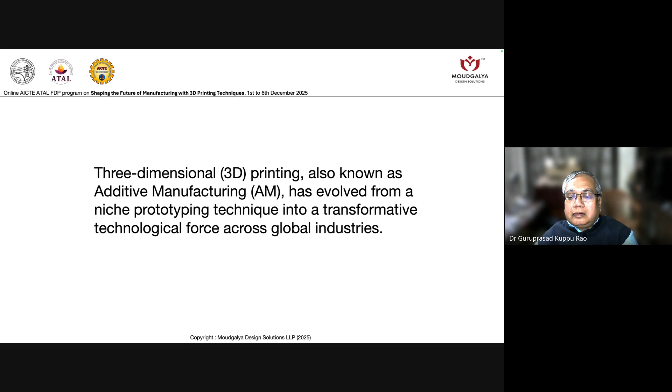So it is a fabrication of material layer by layer, but layer by layer is not a sufficient condition to declare something as additive manufacturing. You will have to ask me why. Later we'll take it. But digital model is the sufficient and necessary condition to call some process additive manufacturing.

Now tell me, CNC is also having digital input data, STL or step files. So can it be called as additive manufacturing? No, because CNC is subtractive, right? It is subtractive. So many times this 3D printing is also called as additive manufacturing with a great promise that

it is going to enter manufacturing. For me, manufacturing means making millions, not one or two, right? But additive manufacturing is something which people have kind of wanted to see that coming. And somewhere we are coming close to it, AM, right?

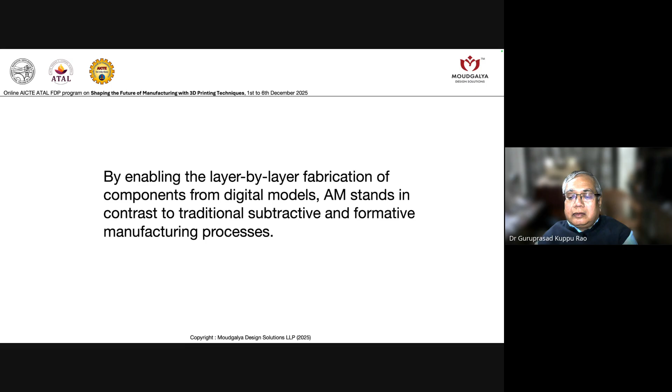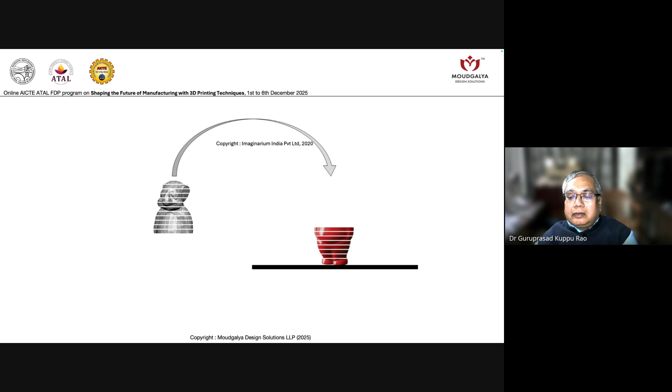So it's a long way. I've been practicing this technology. So looking at this transformation, art to part, is very, very important here. You know, how these objects are created in digital media, 3D model or content creation, 3D content creation, then that is given to a robot-like device called a 3D printer, and it is going to recreate it. With the transformation, we can change many things.

So it's a regime where we create a part directly from CAD, CAD to part transformation. So this is like a paradigm shift, which has never happened before, you know, and this is going to de-skill. People wanted to have some skills to make prototypes rapidly, but those are not required. You don't have to be a model maker. Now you can actually create things.

So this gives you a better design freedom, reduced material waste because you don't have to remove material. You're adding material, what is required. Accelerated innovation cycles because you can fail early, fail fast, and move on so that you don't have to waste time lingering on something which worked or did not work. You make a thing, you test it quickly, it fails, then you have another way. Go back to drawing board and again reiterate.

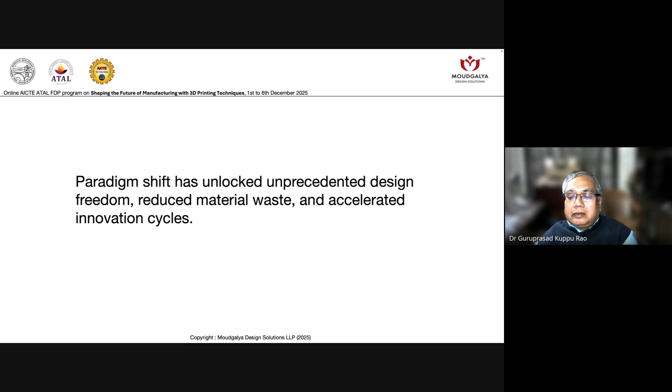Over the past four decades, the scope of AM has expanded from what it was started with, rapid prototyping, to tooling, production, mass customization, and increasingly distributed manufacturing ecosystems.

What exactly is distributed manufacturing systems? We can have a concept of cells across the country, across the globe, where whoever gets the order, the nearest cell will deliver it, make it and deliver it. That is called a distributed manufacturing ecosystem. In order to reduce the so-called lead times, just in time can be achieved by this kind of technology grid, which is a distributed manufacturing system. And it is an ecosystem.

And when we say 3D printing, it is not just everything, there are many things which are there. I'm sorry about this slide. There are some changes which have happened. What enters the value chain here is idea design on the left hand side. At the right hand side, you have the applications for which this technology is used. Now, in between, in the middle, you have 3D printing.

3D printing cannot be done without an idea, without a 3D CAD, without pre-processing, and also it cannot work without materials, without proper care and handling of the 3D printer. Even to create CAD, you require a lot of things like how to design for AM. Design for AM is very important. In order to get CAD, sometimes we go by feature-based design, geometric modeling, or by reverse engineering. So these are the inputs which go into CAD.

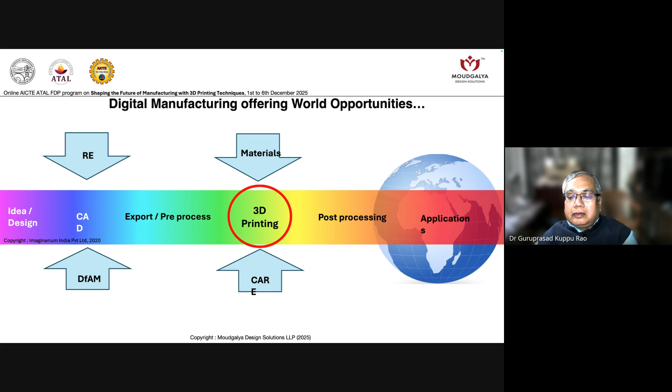As global supply chains face tightened vulnerabilities, just like during COVID time, people are looking now at how we can have a digital factory wherein we can have AM farms or 3D printing farms, wherever whoever is nearest will get that and make it on demand. And exactly this was done during COVID time. A lot of emergencies were there. I remember at Imaginarium, we were doing many things like ventilator splitters. They were not available because the global supply chain was affected at that time, ships were not moving, so we had to make it available on demand.

And digitally, those things were transferred. It was shared without any IP those days. And I think it is a very good demonstration.

Now, coming to the cloud factory, you can see not everyone can actually own printers. MSME OEMs have small and medium printers; larger OEMs like Boeing, Maruti, or Tata Motors will have large systems. Many times an individual designer or maker also wants to do something. So all these are increasingly coming to what is known as online factories. Today it's a new business model.

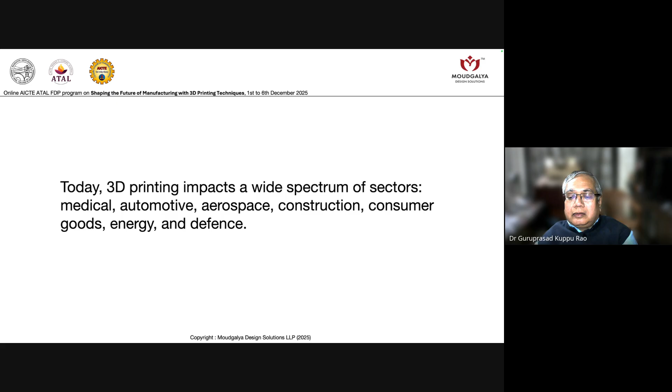So today, 3D printing impacts a wide spectrum of sectors: medical, automotive, aerospace, construction, consumer goods, energy, and defense. We can see there is a huge, changing capability that we have seen. What we used to do in the early days were mostly prototypes, form models, mock-up models, which evolved to a design validation model in the middle, 2010 onwards, and then we have end user parts from 2016 onwards.

Almost one decade has passed since 2016—we are in December, and 2026 is close by, so it's a decade, right? And you can see the capability today: on demand, a one-off part can be made and delivered to the customer. There is no economic order quantity here—economic order quantity is one. That is the beauty of the whole thing, and people are happy.

And what's more, people can actually design themselves and give it to these 3D printing companies to ship them the part they want. So it is like democratizing design that is happening.

Today there are many new frontiers that 3D printing is addressing, such as multi-material printing, bioprinting, hybrid manufacturing, 4D printing, machine learning driven process optimization. The promise to redefine the future of manufacturing is happening today.

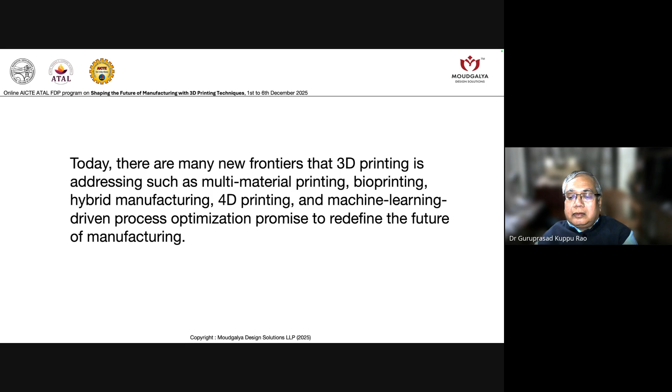Historical evolution of 3D printing. We know historically 3D printing has been attempted by many people. I can say even nature prints everything, which is additively made, right?

We ourselves are additively made. In nine months, we are delivered with a bionic eye, a CPU, a brain, and a natural pump, the heart, etc., which are hard and soft, transparent, opaque, whatever, multi-material, and it's living, right? It's something even more than 3D printing. So if you want to look at 3D printing, you always have to look at nature.

Historically, people have been trying to make prototypes quickly, and that's where they looked at photopolymerization as one of the methods. Dr. Kodama actually, in 1980, brought in the name rapid prototype. Unfortunately, his discovery could not be patented because he had no funds. It was in 1984 that it was applied, and in 1986 it was awarded to Charles Hull, Chuck Hull.

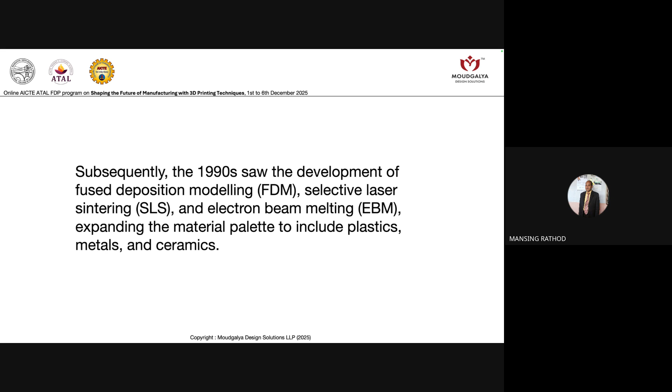Any doubt? Anyone? I hear some sound. Sir, Revas, there is some sound in the background.

In the early 2000s, many open source initiatives such as RepRap came. This led to the so-called makers' printers, open source makers' printers all over - cheap replicas of FDM technology came. RepRap is a printer that is able to replicate itself.

Replicator, a 3D printer printing itself - most of its parts are done this way. Literally, I've seen this with HP's multi-jet fusion, which is an advanced printer that has 50% of the parts of the printer printed by the same technology, multi-jet fusion, MJF - HP's 3D printer, a wonderful technology. And that's how the promise that was made got realized much later, but the capability was realized early on.

This democratized access to affordable 3D printers, and this led to a lot of new innovations. In fact, FDM had several other avatars like SCARA, and then you had Delta printers. These are very much like FDM, but the way they are driven, where the head is used, where the table moves, is going to make a difference.

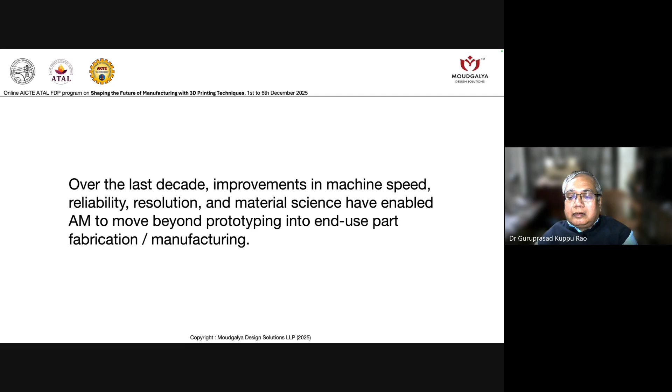Today, AM is recognized as an important player in Industry 4.0. Industry 4.0 is interesting, for me it is coming full circle. We started with so-called CAD, CAM. Before that there was conventional manufacturing, and during conventional manufacturing we started automating with MRP 1 and MRP 2. MRP 1 was material requirements planning, MRP 2 was manufacturing resource planning, and this led further to ERP. But ERP always suffered from lack of design data, so they had something called PDM, product data management. When they combined PDM and ERP, it became PLM, product lifecycle management. And when PLM across new technologies is taken, you get a new age called Industry 4.0, which has got so many components enabled by information technology and communication technology.

These are the two drivers of Industry 4.0: sensor technology and information technology. We are in a regime that is not like a fixed date, it's going to be a band. It is still going on, we are today, it is current. Industry 4.0 is something current, we are in the beginning of it. Maybe in some areas we are already in advanced stages; in some areas we are still entering it.

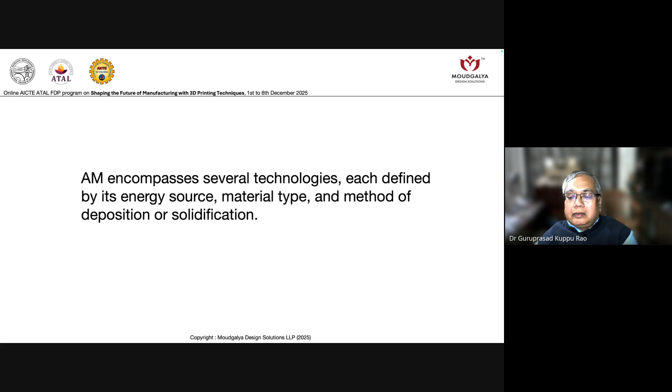AM encompasses several technologies, each defined by its energy source, material type, method of deposition, and solidification. You can see they come in all shapes and sizes, different colors. I love all of them as a user because each one is a beautiful technology. We cannot say something is bad, something is good. They're all good at a particular thing, that is important. They may be bad at something else, but we are looking at the goodness of each one of them. I've added bioprinting here also, which is not formally part of this, but there are a lot of systems coming which are again part of these only.

How to deposit - each AM process offers unique advantages and challenges. Their convergence is giving rise to hybrid technologies that blend additive and subtractive methods for improved accuracy, surface finish, and material integrity. Talking of surface finish, I always remember the 3D printer called SolidScape. SolidScape is essentially used in jewelry, medallion making, or figurine making. After deposition of the wax, the surface is very bad, there's a waviness on the surface. So at the edge, a milling cutter comes and mills that, giving a very nice surface for the next build, every time it does this.

The hybrid technologies beautifully blend additive and subtractive methods. SolidScape is a good example, which is quite expensive because it combines these two technologies. A controller is quite complicated, the G and M codes have to be separated, it is two channel, and hence the expense. But the quality is superb.

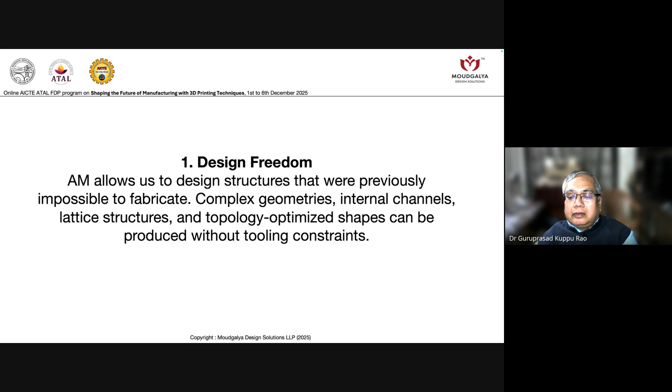You can see some of these are very complex, unimaginable, and cannot be produced at all by normal manufacturing wisdom. Why unimaginable? It is like you have a mathematical equation driving these curves. You start giving n equal to 1, 2, 3, 4, and start getting new proliferations, just like a kaleidoscope. At every change in n you get a new shape, and you freeze wherever you like, save it as a solid, and give it to the 3D printer to print. No questions asked. Some of these are impossible to even imagine.

Customization and personalization are very important aspects, be it custom jewelry design, custom implant, custom device, or custom footwear. All these go by the anthropometric dimensions of the user. Anthropometric dimension means each one of us is a different size and shape. We are unique people, so in order to have something designed and made for you, it is not just customization, it is personalization, and individualization in fact.

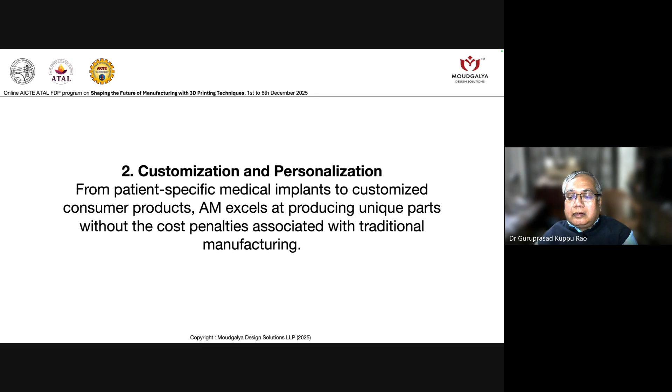You can see here, this is a wedding ring I made. What you see in light blue color is a wax model. The bride and bridegroom's finger thumbprints are taken to personalize this with names inside, which go inside the shank, and it has been additively made in wax, then cast in metal using a lost wax process or investment casting. This was actually gifted by me. It exists, it is not a concept.

Material efficiency: many times we say near net shape. What is near net shape? You take a cylinder, turn it, and make an artifact. Suppose you can make that artifact directly at its gross size, or what we call net shape. Net means gross, and that is possible by additive manufacturing or 3D printing, because we build layer upon layer. Only what is needed is deposited in the same shape as required in the end, and in between the two layers we fill to get the solid section.

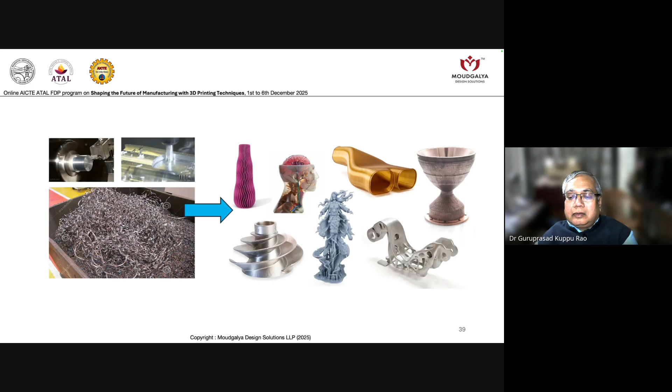It could be of many natures, you can have honeycomb also there, and these are all impossible by conventional manufacturing systems. Scrap is minimal. You can see here in conventional manufacturing wisdom so much chip is generated by turning or milling, but the artifacts on the right hand side are all made additively, as net shape, gross shape. There is no chip here. That is the beauty of 3D printing or additive manufacturing.

On demand production: what is on demand production? AM supports decentralized manufacturing, enabling parts to be produced as needed. There's no need to carry inventory, you can have a digital inventory instead, and because of this you can have a very short supply chain.

Locally, one industry can supply things without needing an elaborate highway or transportation network to carry this out. We had earlier mentioned the decentralization of manufacturing, and I think that's really what is going to ensure just-in-time production, just-in-time supply, and just-in-time consumption. In load centers, suppose you want a drug to be made, you can have a 3D printed drug ATM placed in the tertiary care center, or wherever people want to buy it.

You don't have to have a factory and make it, but you can actually have it in the tertiary care hospital only. Drugs can be given like an ATM.

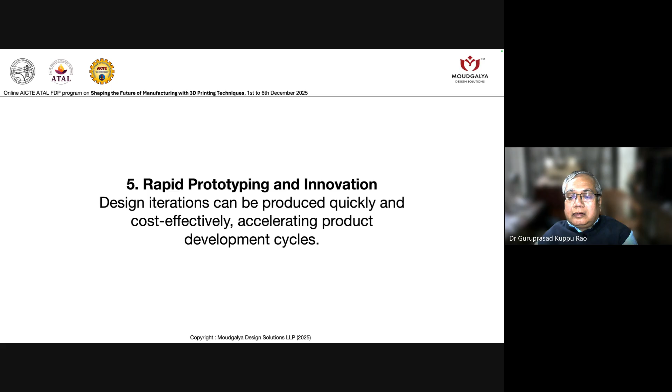An idea could have potential to be innovative, but you will never know. So it is very wrong to say innovative idea, because you will never know what comes after that, whether that is the end or there is another iteration you're going to make after the feedback is received. These are called development cycles, and the whole thing gets accelerated. That is very important.

Lightweighting is a great advantage, particularly in technologies like SLS. One can have a nested product, a product which is pre-assembled, because the support here is powder, and in CAD you don't have any gravity, so you can have a ball inside a ball inside a ball, as long as you have some means to remove the powder in between. After removal of powder, all these balls will collapse inside.

In fact, these models used to be made to show people. I don't have those models, I would have shown otherwise. These are wonderful things, and they are achieved by lattice.

It is like a sponge-like structure, a structure which can be seen readily in nature, like bone structure, or what we have, the coir structure, or sponge. All these have lattice, and the lattice can be regular or it could be varying functionally. Sometimes we call this the functionally graded material. When we go to material, we'll discuss that.

They have a kind of polarization of the strength that is required. In a particular area, you need something to be strong, something to be lighter on the other side, just like in bones. In bone structure, if you take a section of it, you will see these are optimized geometries. The lattice structure is made in such a way that wherever strength is required, where resistance is required, you find closer density, and wherever you need light weight, you have a sparser density.

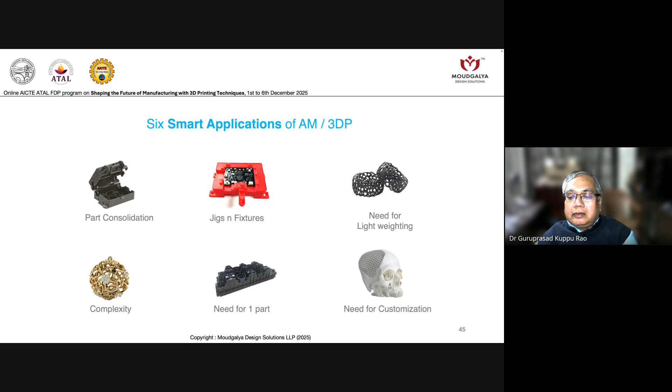Current applications across industries are many. I'll not go deep into every one of them because I know if I cover all the course contents, what will others do. I will not touch upon these things in depth, but I'll just list them.

Aerospace and defense. Defense today is becoming very strategic. Defense for peace, not for war - it is for deterrence. You have the capability and I have the capability, so be careful. That kind of deterrence. Today wars are very rarely fought between equivalent powers. With very powerful versus very weak people, there is war, but whenever they are equivalent, wars are not happening. That is very interesting.

Automotive industry - as you know, each car used to be made up of 30,000 parts earlier. It's all coming down thanks to part consolidation, which gives better reliability. The systems are changing from IC engine to EV, so a number of parts are changing.

This you can imagine like how a mechanical watch today has become a quartz watch. A quartz watch still has gears, but very few. A mechanical watch has such high complexity. At Titan, I used to have a watchmaker's lathe - we used to make very precision gears and shafts which can only be seen under a microscope, all mechanical. Today, because of quartz technology and a stepper motor, the whole gear system has come down. So I compare this with the conventional automotive system versus EVs.

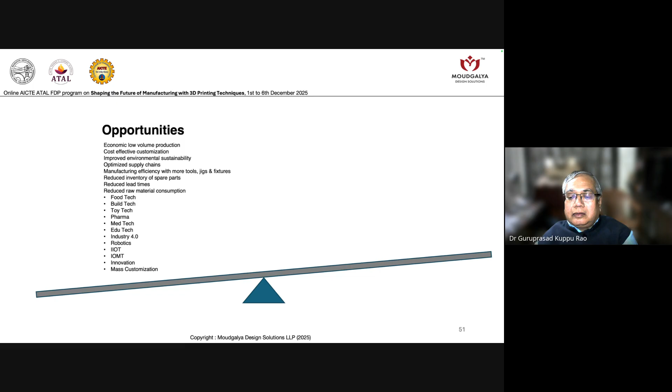Moving on, you can see there are a lot of challenges on one side, and a lot of opportunities on the other. Opportunities like food tech, build tech, toy tech, pharma tech, med tech, edu tech, Industry 4.0, robotics, IIoT, IOMT, innovation, mass customization. All these are going to outweigh the challenges.

3D printing is not standardized. Additive manufacturing impacts environment. Equipment and product costs are high. There is no 3D printing knowledge - there is a knowledge gap. Additive manufacturing complicates intellectual property. There is limited material available. All this we have discussed; the same thing is put in a graphic.

Future avenues of 3D printing - there are many, and we are going to list them.

Multi-material and functional printing - very important thing. For example, you start with bimetal, copper and nickel, or copper and iron kind of thing. It can become a smart material. For bimetal, you have the thermostat and all - they have their own property, because given exposure to temperature, one side expands more than the other, thereby making it sag, thereby controlling a circuit intelligently. So materials themselves can be very smart also.

They are using this in dental implants and surgery. There is what we call 4D printing sometimes - adaptive materials which respond to a stimulus: temperature, pressure, light, sound - it could be anything.

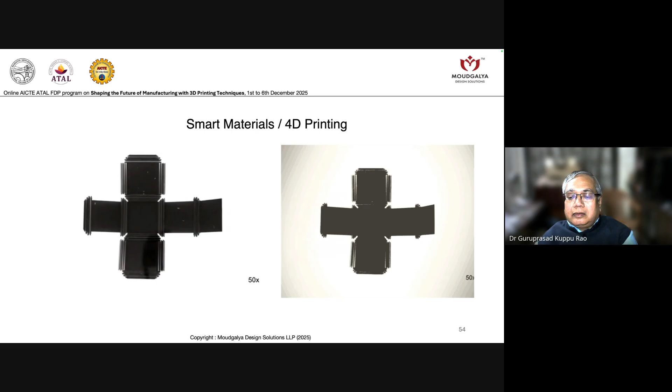Ethical, social, and regulatory considerations are other very important aspects. Some important questions: how do we regulate decentralized manufacturing? Who controls it? Who maintains the quality? Who will regulate it is very important. There is no policy for this from the government, manufacturing people, or the cluster - nothing has been formulated.

I remember working on this project with Professor Attanu. Sometime back, it was given to FICCI, through the government. We don't know what is happening there. What are the safety standards for 3D printed medical devices? What happens? Who has to be held responsible? These things need to be addressed too, because medical 3D printing risk is very high if something happens - it will affect somebody's quality of life, and life itself.

How should government address weaponization risk - 3D printed firearms? Today we have so much terrorism. We hear so many things, white collar terrorism - doctors are becoming centers of terrorism by carrying out some of these activities. Now, what if they can print their own firearms or bombs, or things which cause mass destruction, using 3D printing? This is again a very important issue.

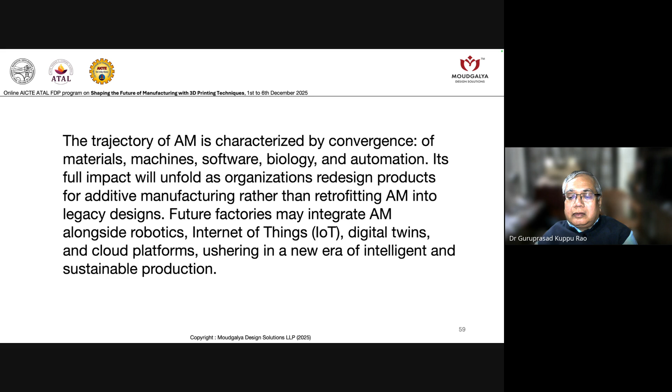AM will not completely replace traditional manufacturing, but it will increasingly complement and enhance it. High volume components like nuts and bolts, washers, even street poles, will go into conventional manufacturing - they're made better that way, like injection molding, extrusion, machining - while AM will dominate complexity, low volume, customized, mission-critical applications.

So in fact, people are looking at extraterrestrial building things on the Moon, building things on Mars, or maybe Titan, the satellite of Saturn, which is very much like Earth with a blue sky and all. So people are looking at many things like that.

In conclusion, 3D printing is here to stay, and it has its own evolution. It is not, though people thought it is going to make a revolution - while the contribution is revolutionary, I think it is evolving to deliver value, and it is on its way.

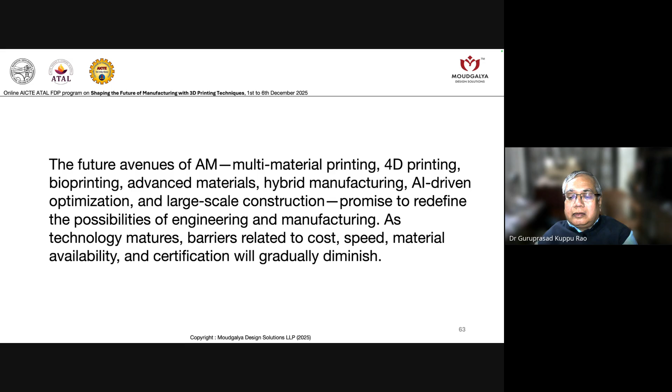Today we are saying it's still costly. That's where it is a big hindrance. In future, I think we hope all these things will be addressed.

Ultimately, AM is not merely a method of application. It represents a new philosophy of making - a new way of making things. One where complexity is free, customization is standard, sustainability is achievable, innovation is democratized. The coming decades will witness AM becoming an indispensable pillar to global industry, healthcare, infrastructure, and our daily life.

Thank you. I think with this we come to the end of the presentation. I would like to take a few questions.

Reva, you can take the control. Yeah, thank you very much, sir. Very insightful lecture, sir. Actually, I was listening to you, and I'll ask the first question, and then I will leave it to the participants.

Because I'm very curious about a few things which you mentioned in your lecture. So, sir, first is the legal aspects you mentioned. How is the preparedness as of now regarding the legal aspects, particularly in India, if you can take that into consideration? No, it is evolving.

I'll give an example. When I had a call from a surgeon way back in 2012, more than 10 years ago, and the patient's family thought I could help them, I could save them, but I had no idea how. We went on to discuss a cranial plate, which was supposed to be 3D printed.

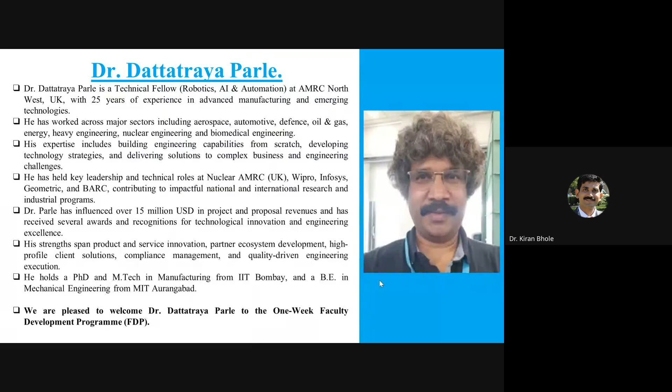Thank you, Dr. Kiran, and thank you for inviting me. Nice meeting you online. Since COVID days, we have not met physically, right? Maybe when I'm in India next time, I will certainly try to meet you. I'm not sure how I'll share, but let's see whether the sounds of the video will come. I don't know.

Is that visible, Dr. Kiran? Yes, yes, it's perfectly visible, and audible also, very well. Okay, thank you, Dr. Kiran.

For the participants' information: myself and Dr. Kiran were doing PhD together at IIT Bombay, and since then our journey started. It was wonderful. We try to keep meeting on various forums, and this is one of the forums where Dr. Kiran always tries to involve me in some of the things at Sardar Patel.

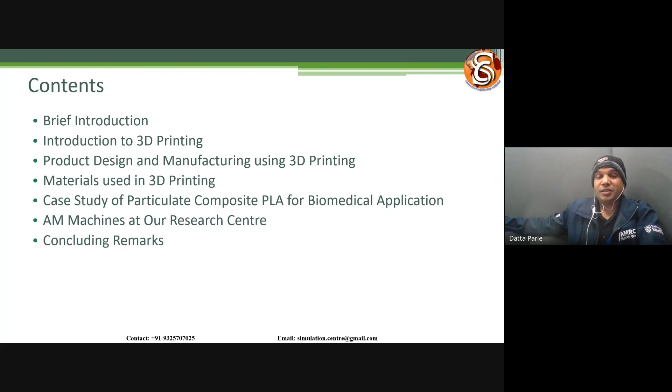Brief summary: for maybe two decades now I've been in industry and research, mainly, but also associated with a lot of academics, through people like Dr. Kiran, mostly in Mumbai, Pune, Maharashtra. I'm involved with many institutes, delivering lectures or participating. I've done a lot of different work in my career. Primarily in my early career I worked more in CAD, CAM, and CAE, and then in the last decade, more focused on emerging tech like Industry 4.0, digital twin, additive manufacturing, VR, AR, autonomous vehicles.

I also did my nanodegree from Udacity as a self-driving car engineer, probably another future technology. I was also a major part of software development, participating across the product life cycle for different customers, concept to manufacturing, in aerospace mainly, automotive, and nowadays a lot of defense work, but defense of the UK, not our country, oil and gas, energy utilities, and nuclear early in my career. When I moved to the UK, I worked at a nuclear research center, and then in biomedical.

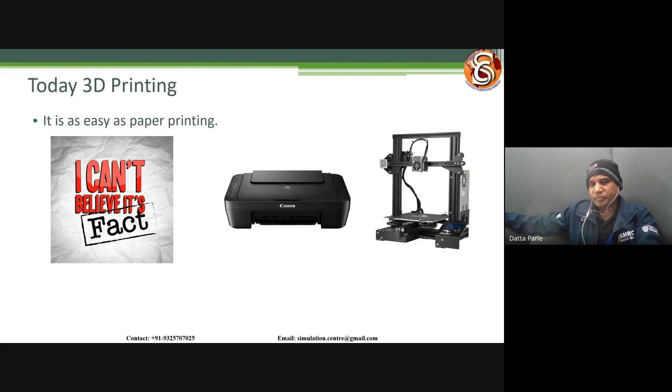Today, 3D printing, I'd say, has become as easy as paper printing, if you are looking for low cost options. I'm not talking about industrial printers, I'm talking about common 3D printers. If you look at the shape and size of low cost 3D printers versus paper printers, they are comparable today.

The way 3D printing works is the same way as paper printing. What we do in paper printing is create a document. We open a doc file, write something, send that file, and get a hard copy of it. Same way, if you know a bit of CAD, you create something in CAD, send it to the 3D printer, and get that part ready. That's how it works.

Even if you look at industrial printers, they work similarly, but there's added complexity in terms of what kind of material you handle, toxicity, temperature, maintaining those parameters, and other challenges. But as a common man, if we're looking at 3D printing, it's as simple as that - as good as a paper printer, right?

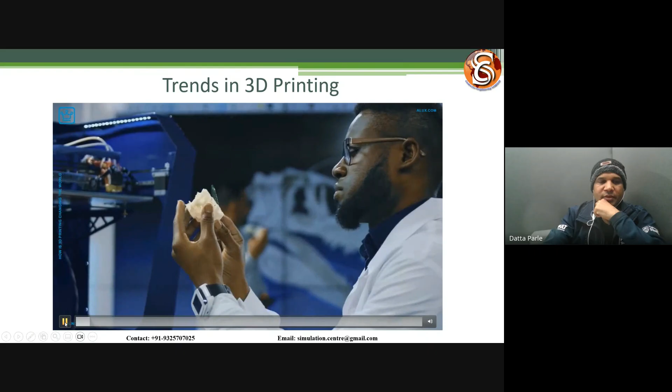So maybe I'll play, I don't know. That's what I was thinking. Let me know if this video sound is coming through. Understand how possibly it's going to change things. Is that audible, Dr. Kiran? No, right?

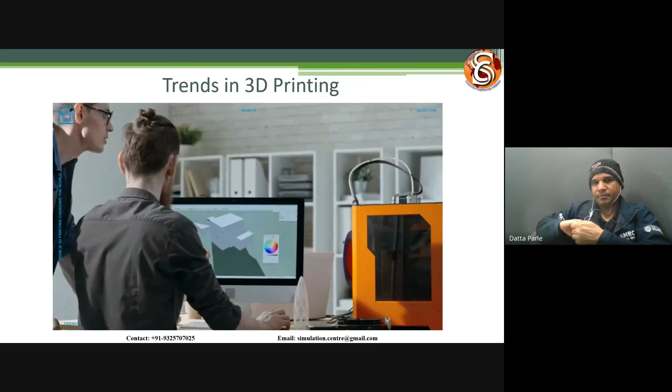What if you could print your pizza in your own favorite shape and then have it for a meal? What if you could print spare parts for your grandfather's antique car and have it fixed for him? What if you could make your own custom-made objects at home for your loved ones without paying extra charges for the customization? What if you could build your dream home in a shape as complex as you want without compromising your aesthetic sense? And what if you could save the life of your loved ones by replacing a damaged organ with a 3D printed one?

So, I mean, this is the reality. This is going to be the future. This is what's happening.

Just to give one example - before I shifted to the UK during COVID, I was looking for different kinds of jobs in research centers and companies, and applied. I thought I would also try a postdoc, and I got one postdoc, which I later did not accept, in biomedical 3D printing. So there's a lot happening, and that's what you can see - the future is going to be there.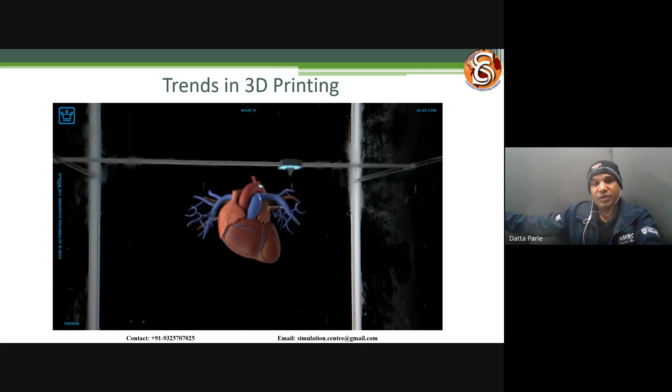3D printing is there to create some magical things in the future. So maybe I'll quickly go into this - you will hear this again and again, but I'll quickly try to jump into it.

Manufacturing is a manufacturing process, right? There are several manufacturing processes, and as a mechanical engineer, we have been studying forming, casting, machining, powder metallurgy, welding, and all sorts of different kinds of manufacturing.

Now, for probably a decade, we've been hearing a lot about 3D printing, or alternatively people call it additive manufacturing, but this is not very new. Earlier also it used to be there, but when I was doing my masters at IIT, it was there, but I didn't realize it would be the future of manufacturing.

So there are various subtypes, we'll go into later, but the way we call it additive is because we add the material. It is an addition of material instead of removal of material, or changing the shape of the material. We are adding new material in some way, and that is why it is called additive manufacturing.

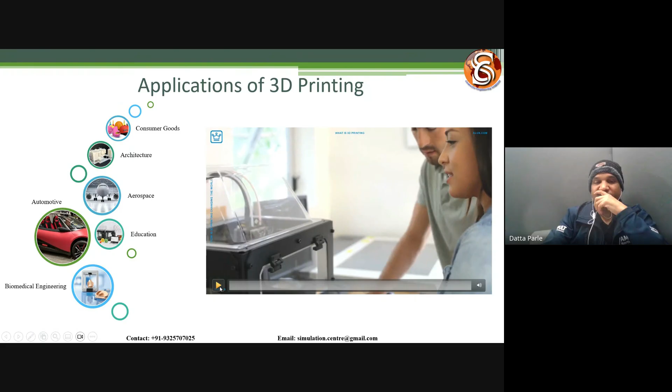Maybe you might be hearing stories these days. Somebody has constructed a house using 3D printers, or somebody has constructed automotive parts using a 3D printer, or somebody has manufactured aerospace parts. So it's not novel now, because more and more development is happening in this world. A lot of applications are increasing, so here is a brief video.

You can almost create or print anything and everything using a 3D printer. So let's take a look at a few of the applications where this technology is currently being used. Where are we now?

Today, 3D printing has found applications across various sectors and has helped these sectors by making it possible to create objects that are costly or difficult to produce using traditional manufacturing techniques.

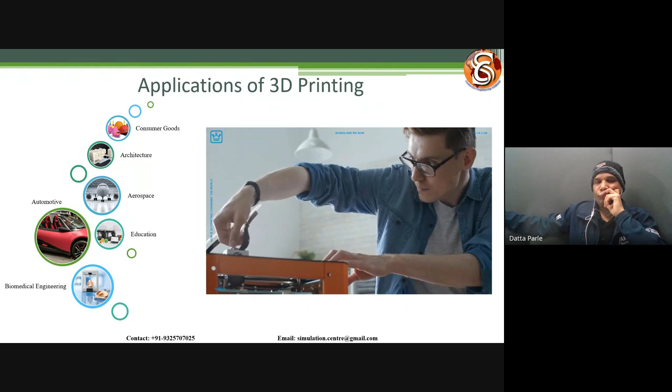In the automotive field, German automotive manufacturing giants like Audi have been using 3D printing for quite a few years now, and as recently as 2017, they started their own 3D printing center in Ingolstadt. Audi uses 3D printing for manufacturing spare components with complex geometries, which are otherwise costly to make, considering the low volumes that are produced.

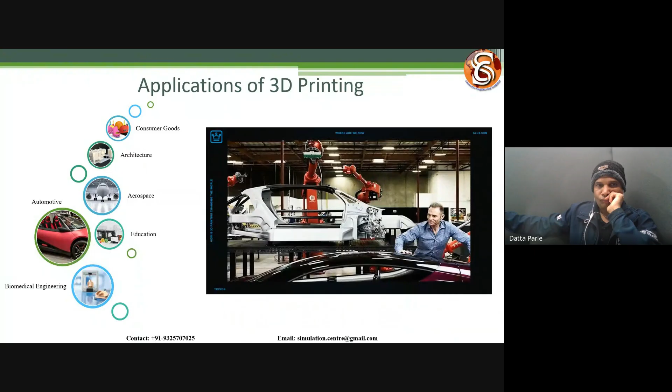However, the use of 3D printers is not just limited to making spare complex parts. Now there are several startups like Divergent 3D that are prototype testing 3D printed cars. These startups have at present successfully created car frame bodies and chassis using 3D printers and are aiming to develop entire cars that can be 3D printed.

Considering the nature of this technology, 3D printing helps to eliminate the waste and pollution created by factories, and will not only change the automotive sector but the entire manufacturing sector in the coming years as it advances over time. In the field of medical technology, a lot of research has been taking place to explore the opportunity of

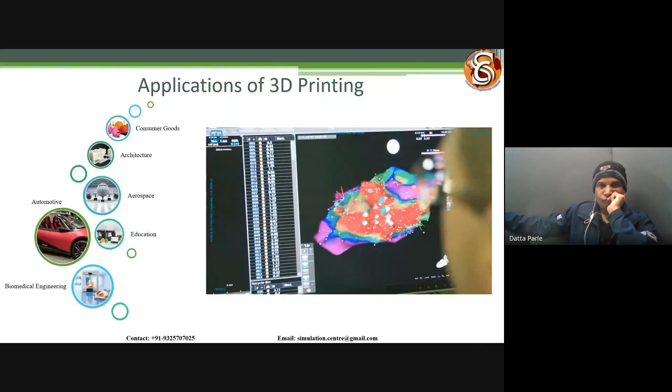creating 3D printed organs that could be used as a substitute for organ transplants. Once fully functional, this technique could help doctors create organs and tissues compatible with a specific patient's anatomy.

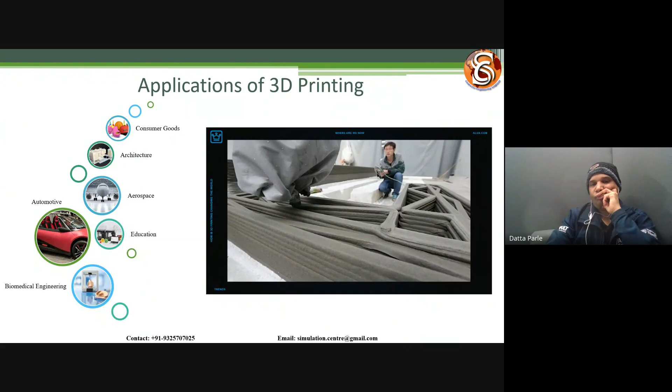In the field of construction, Dubai and China, who are considered to be construction giants, have been working on developing 3D printed houses and skyscrapers. In fact, a company in China has claimed to have built 10 houses in 24 hours using 3D printing technology, whereas Dubai is claiming to build 3D printed skyscrapers by 2030.

Such applications in the field of construction will not only help in cutting down the manpower costs and inefficiencies involved, but also make it possible to build complex structures in shorter time and in a cleaner way.

3D printing is also disrupting the food industry, and 3D printers that can be used to print food have already been prototype tested in England. These 3D printers can be used to create food like pasta and hamburgers in your favorite shape, and all you need to do is cook them in a microwave once ready and eat. Sounds kind of fascinating, right?

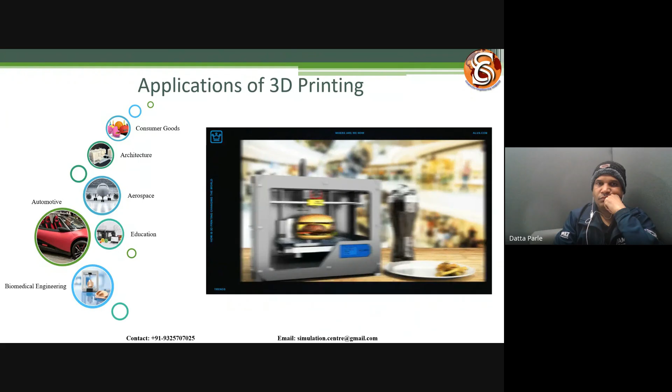Some of these food printers are also available for sale, and you guys would be delighted to know that one of our favorite fast food giants, McDonald's, has announced it would be selling completely 3D printed hamburgers called McMac by 2020.

So that is a brief overview. I mean, those videos were old, this lecture is more than 5 years old now. So going into the history, I still remember.

The 80s and 90s were still infancy days. I completed my BTech in '99 and joined IIT Bombay for my master's program. There was a professor, Karunakaran, who had developed this layer by layer deposition machine - at that time we used to call it rapid prototyping. If I have to be honest, it was such a slow process that I used to think, is this going to go anywhere in the future? Maybe 20 years later, or 10 years later, I was wrong - that is the most talked about process today, the most talked about machine which he used to demonstrate and teach us during that time.

The early 2000s changed a lot and made a lot of progress, and since the last decade, 2011 to today, it's been tremendous. At the research center where I'm working, although I'm not exactly part of the additive manufacturing group - I'm more into AI and automation for all the groups - we have state of the art, the world's largest industrial 3D printers. We are trying to create the most complex parts for aerospace, defense, and automotive sectors. I'll not go into too much detail on this.

Taking a step back - during COVID, I was doing a lot of 3D printing, and people used it for a variety of purposes. People started creating things like hooks to avoid infectious diseases and contact. I also tried creating some. The process is simple: you create a 3D model file, a CAD file, send it to the 3D printer, remove it, clean it, and use it. I did a lot of my own products, mainly for personal use.

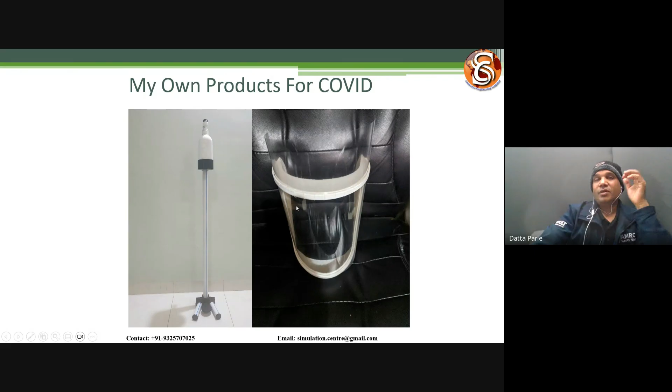During COVID, I had my own startup, a simulation center, and I used to do a lot of different things. One of the first things I did during that process was create a lot of 3D printing products, and all of those were available on Amazon. Some of these are here, though many I haven't listed.

I was also working on another technology called VR, virtual reality, and created VR headsets, lots of different types, forms and shapes. For Christmas, we made some customized ones - the first VR headset we created was tricolor shaped, and these are all different mixed colors. One good part of this 3D printing was it was all done using the lowest price 3D printer, the Ender 3, and I did a lot of research and experimentation with that.

All these are jointless - a complete one piece product, no joints, no separate color parts. We even did some DIY kits of the same headset. Then we created something called the VR selfie. I was also trying to design filters for doctors during those COVID days. And this was one of the popular items on Amazon - a 3D printed Pac-Man game. It was very popular, but unfortunately I had to stop that and shift to UK.

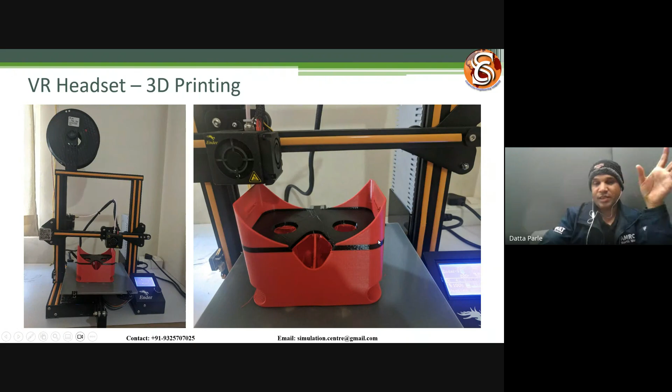So, let me see if this video works. This is a kit from the Simulation Center to make a more durable VR headset. This is what you will get.

So these are the parts: this is the base plate, top plate, flap, lens plate, side plate, splitter, lens holders, lens, Feviquick, and this is a plastic rod - I call it noodle.

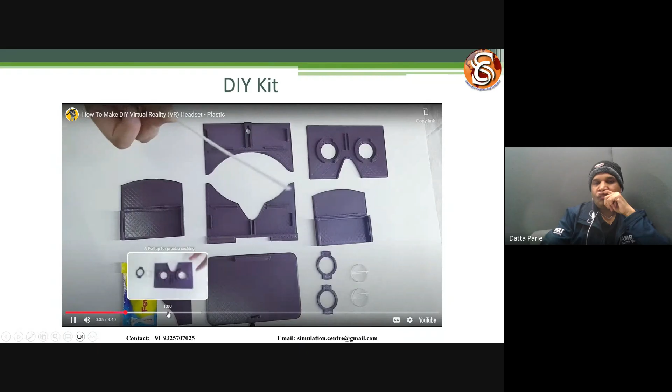So I'll just show you these parts being used. We used to create a VR headset, and that VR headset, if you want to see, can just store it. And if you want an elastic band, you can use it. We used to play a lot with this.

We used to do a lot of experiments with this, because the way you print the 3D part on those machines has its impact. That's how my PhD students' research led to my experiments with this machine, and then we did a lot of research on that.

So then there were some, we started doing industrial products and all that, and then COVID started, and probably we stopped. I did not do much later.

So at one point of time, I was an Amazon entrepreneur, I call it. I used to create a lot of 3D printed products and sell them on Amazon. And that was something I thought would be a base for the research I did later.

A couple of students I was co-supervising in India worked on it - one was from Uttar Pradesh, one was from Pune, and again two different topics. One was in artificial intelligence, one was in...

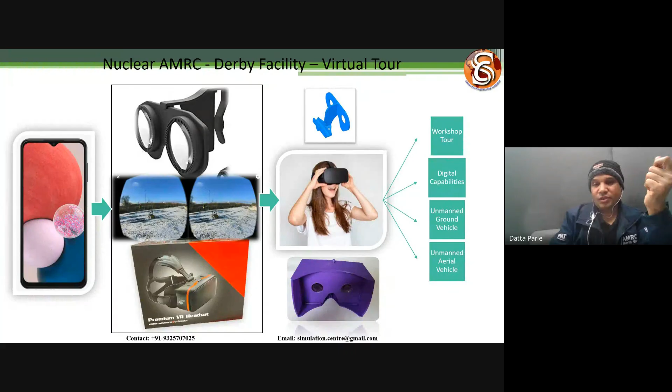I'll be talking more on that, and then after coming here also, we started creating our own in-house 3D printed VR headset for virtual tours of the facilities, and for that my VR headset got some recognition.

A Business Standard article was published, not for the 3D printed version, but because I created a VR headset for 200 rupees - it was the lowest price worldwide. Those days, I'm probably talking about 2017 or 2018, so it's been 7-8 years now.

And those days VR was a big boom, like today's AI, and the VR headsets were costly and all that. Then I led some VR services based businesses in Infosys, and after leaving Infosys, I created this cardboard VR, and that changed everything.

Later, once I was successful making that popular and selling it on Amazon and various places, then I created further products. I did 3D printing work in Infosys, where we were trying to create a strategy for how existing parts in aerospace and automotive could be replaced with 3D printing, and that's where I got additional knowledge of 3D printing.

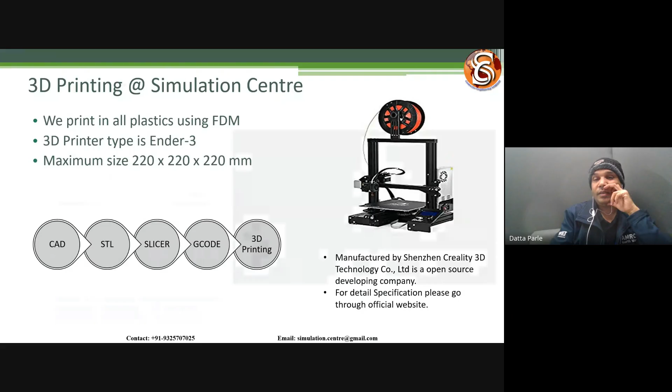This was the printer we were using those days, and we created a variety of those products you have seen. This is called FDM 3D printing.

Now, the way FDM 3D printing works - I'll just show this, probably many of you already know this.

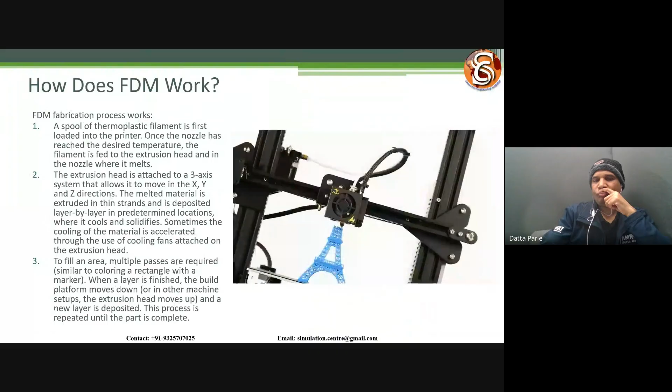So it's more like a structure, like a three-axis Cartesian robot. You have this filament spool which is melted and deposited - there's a program running to deposit this material, and motors are there to move it in the x, y, z directions and all that.

That's how it works. You can control it - essentially it runs on G-code, which if you're familiar with NC programming, you will understand. That's what we used to do - I used to do a lot of experiments with that G-code to get what we wanted through these low cost 3D printers.

And that's how then a lot of interaction started with the industry and with academics, and that's how two students started doing PhD with me, and I continued even after coming to UK, and that is how it became the...

One of the philosophies which I was trying to run at the simulation center was that we won't do prototyping. Often today people talk about 3D printing as prototyping, but we said we'll create directly the product using the 3D printing process.

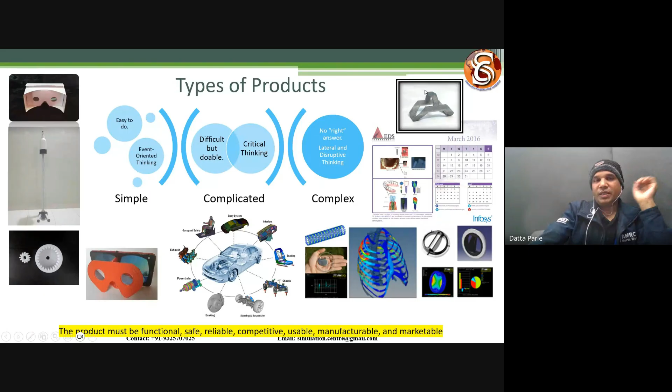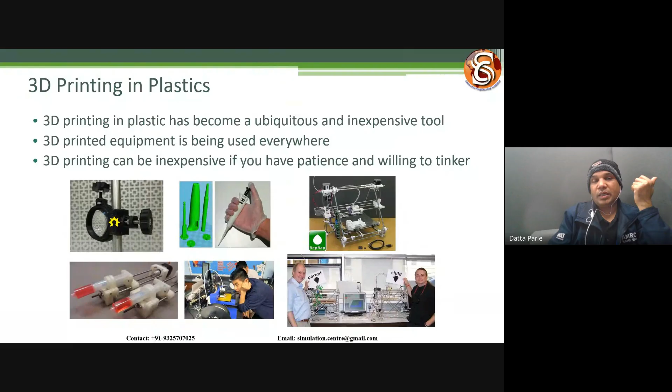So this is FDM, fused deposition modeling, but there are some advantages as well as disadvantages. FDM is the most cost effective today for thermoplastic parts and prototypes, and a wide range of thermoplastic materials is available, different kinds of materials.

Probably, if I did not really calculate, but I might have used almost 200 to 300 kg of material, plastic PLA primarily, and maybe some amount of ABS and other materials during my startup days. FDM has low dimensional accuracy compared to other 3D printing technologies at industrial scale.

But there are several challenges because of the way it works, right? Post processing is required, sometimes adhesion issues, and that is how one of the PhD students came up with this, because of looking at these challenges, since we don't know how to print optimally. We had to do a lot of experiments first, ensuring repeatability of the product. We had to think about whether we should print vertical, horizontal, all that. So these are the other challenges.

Because the core topic is on materials, right? So my students' research is on materials. I wanted to talk more on that, so I thought maybe I'll give this background, how it started, where it comes from, and material use in additive manufacturing. There are a lot of materials being used - a variety of materials. People are trying ceramic, smart material, electronic. Now there is 3D printing - in our research center they are experimenting 3D printing of PCBs, and there are biomaterials, composite materials, hybrid materials, alloy.

Someone was asking whether we can use alloys. Yes, nowadays alloy materials are coming. Polymer materials - I talked about and showed you a lot of polymer products. Metallic is also now very matured. Metallic polymer is very matured. All the others probably are still kind of in a trend. We don't know where, but in the next few years probably they will mature and become one of the mainstream materials, the way today polymer and metallics have become.

And to some extent I would say alloy will also become mainstream, because if you are able to do metallic successfully, maybe alloy metallics would probably also be done successfully. But in future, maybe biomaterials - pharmaceutical application related materials, or electronic side of application of materials, or food side - are still at very initial stages and may take some time.

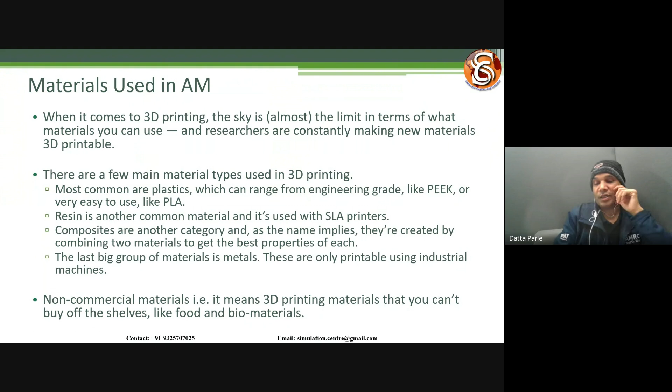And then metals I already mentioned, and maybe in future you will have more. Today it is not very commercial because the technology has not matured much, but in future biomaterials, food materials, or pharmaceutical materials might become very common. Who knows, maybe you will get a machine to print your own pharmaceutical medicines.

In FDM 3D printing, mostly plastics are used. The very standard, very common plastics today are PLA and ABS. Then another engineering category of plastics - a lot of those are TPU, and I have used nylon and PETG in my startup. Probably advanced plastics I have not used much, but they are there. A lot of our work was around PLA and ABS.

One of the things I want to talk about - PLA and ABS, although they are very standard plastics, PLA is a thermoplastic and has also become very popular in biomedical applications because of its relatively good strength, biocompatibility, and biodegradability, as well as simple processing and modification. That was one of the things which gave the direction to our research also.

Now, what are the challenges with plastic 3D printing? Some of the challenges, again coming from my own experience, and I have picked up some pictures from the internet just to make it clear. So there are challenges with respect to...

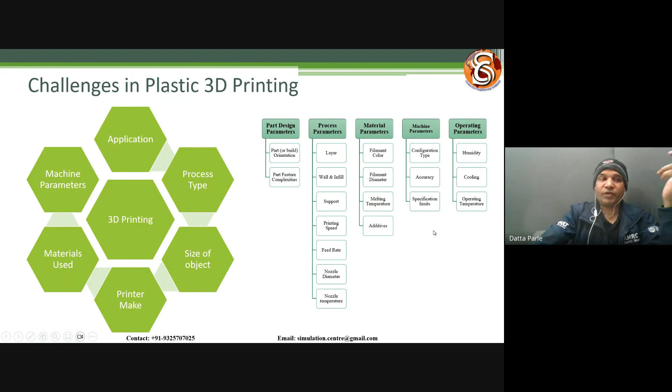Most of this we have seen in the VR headset - one single piece, not the DIY kit - and in that face shield, a big helmet kind of face shield. So we have seen layer shifting many times, and layer shifting was very common for thin parts, and it affects the print. We'll talk about the analysis we did later.

And then there is layer separation, because when the part, like this helmet part, or our VR headset which was almost 180mm in height, and this helmet kind of face shield was also around 200mm - by the time we printed the top layer, we probably started seeing some of these issues.

And then clogging became one major challenge for my PhD student, again because of the nature of the material we were trying to use.

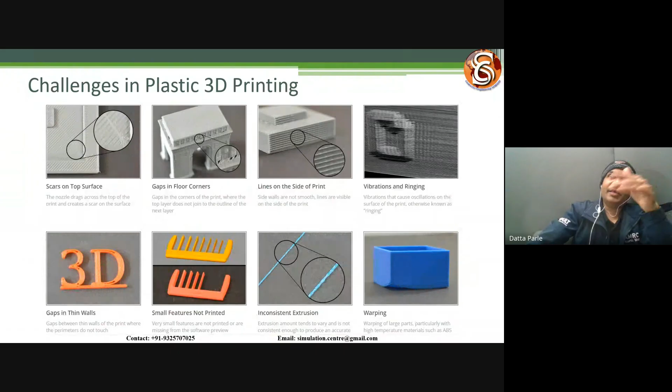The maximum thickness in that product was 2 millimeters in any wall - 2 millimeters was the maximum thickness, you can imagine. Many other products were also so thin. Even my student's specimens for strength testing were in that range. We did extensive work for that.

So these are some of the things we observed, and that helped a lot. I mean, we did not really try to address these in our research, but these observations and experiences while manufacturing my own products helped me guide a couple of students in their research.

So what he wanted to do was PLA composite PLA for biomedical application. And why PLA? As I said, PLA is biocompatible, and PLA is now approved by FDA for medical application.

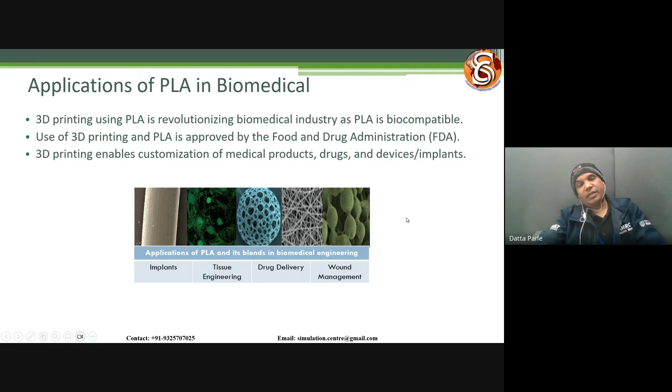In future research, people are now trying to use PLA for implants, tissue engineering, drug delivery, wound management, and a variety of purposes. That is why we wanted to make sure how we can make a better PLA, a different PLA, considering biomedical application. Then we started looking at one of the proposals he made, which was composite PLA.

Then we started looking at what way we can do the composite PLA, how researchers are doing it. So people probably use fiber reinforcement composites. Maybe we also thought, can we now use some metallic

filaments within the filament? But then the question was whether it should go through the spool and then melt, or how are you going to ensure the melt, or maybe can we put some finite length microfilaments while printing itself. A lot of that research we are trying to find out, how do we get or can we do a nano composite, or can we do a particulate composite

adding different kinds of particles into the PLA material, different polymers, ceramics or metals, other materials to improve the PLA performance. So we were experimenting, we tried almost all, but finally we realized, within our laboratory environment or our own constraints, we may not be able to do any of this. Maybe we will go ahead with this, and that's how we decided.

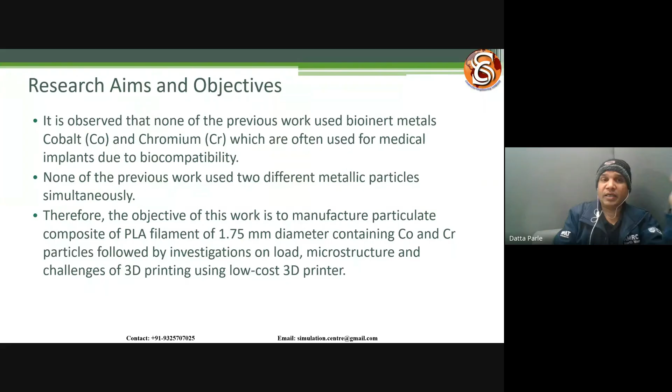So then, during my product design days for 3D printing, I came across a lot of parameters of it. So I asked him to study this, specifically focusing on orientation, because I observed through my own practical research experience into my product that orientation has a major impact compared to any other factor.

So I said, let's study all the parameters and see if orientation is still the major factor to study for any of the products. Another reason was that any complex part can't have just one orientation—it will come with a combination of orientations for different regions of the product. So that is what we observed.

Now, for example, we selected one application, let's say a finger splint—an external device. We really didn't want to do the internal part, since we never had biomedical testing capability. So we thought we'll go ahead with some medical device which is externally used.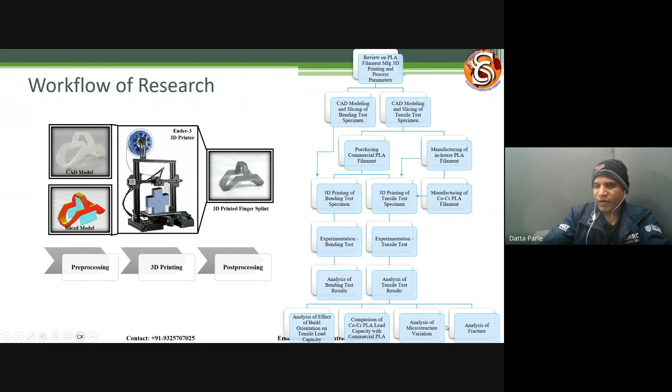I said it was the most common based on my own experience, but we also wanted to address the product design related challenges, and then comparison with variety of other analysis of fracture, analysis of microstructure, and all that. So what we did to begin is we bought commercial PLA. That was the reason.

If you see this finger splint, if I am printing in this way, different regions have different orientations. If I take a tensile test specimen here, some regions are vertical, some are inclined, some are inclined on the edge, some are flat on the bed. So these are all considering the possibilities for any complex product. We'll have a variety of orientations.

We started, different names are used in the literature. They may simply use X, Y, Z or upright, flat, edge and all, but we came up with a common terminology. Flat means on the bed. Flat with support means I'm not directly printing, like for example this top one, I'm not directly printing on the bed, but there will be support.

So flat, it is a flat part, but more like this region, but on a support. And then this particular one, it's not on the edge, but edge on the support. And then there is this region, if you see, this is on edge 45. Then this region probably here is upright 45. And if there are some vertical regions, it will be upright.

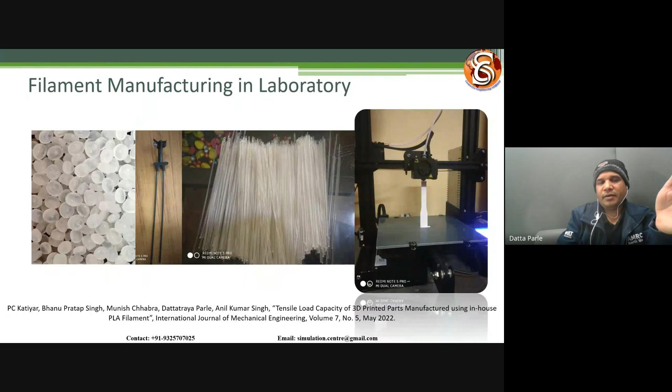And then after creating this PLA filament without adding material, we wanted to check how our own PLA stands in comparison with the commercial standard PLA. This was the machine within which we had this kind of dies of 1.75, and these were the specifications of the granules. And then we followed a certain process of extrusion, melting and extrusion to get that finished filament.

And once we got that, we compared it. You can see now, it stands very clearly - maybe commercial PLA, these dotted lines were showing some higher load capability than the in-house. Maybe because ours was in segments, and we are not sure what PLA granules or raw material they use. We assumed we tried matching that property with the granules, but maybe that is one of the reasons for that variation. It also showed similar trends, right - all strong and weak group.

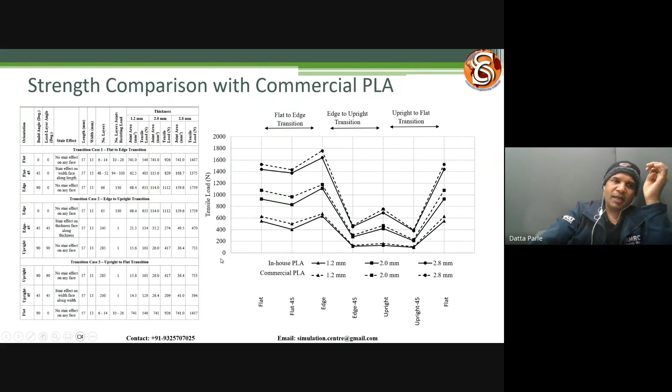Additionally, we did some more analysis of why they are not matching, and this probably could have been done for the earlier part also. We observed there is something called a stair effect, and that stair effect became one of the key understandings for future, how the fracture behaves, right.

So the thickness maybe 1.2 or 2 or 2.8, right. And when you are printing in different orientations - if it's flat or edge or upright, probably you don't see the stair effect. But whenever there is an inclined orientation, this became a factor, and that was one of the reasons where this has also played a critical role in the way it fractures.

If there is a stair effect, then it is a fine kind of fracture, an easy fracture. If there is no stair effect, then it was a more strong component and failed differently, and that is what we checked - what is happening with the fracture, layer strain, layer area, and a lot of that analysis. How much is the joint area, what is the area of resistance, and how that is correlated. So when we tried doing analysis, we tried validating with the mechanics behavior of the failure.

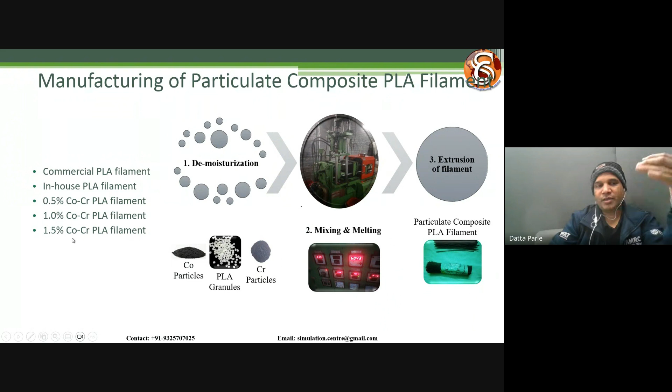Now we followed the same process - melting and extrusion - and because of adding this cobalt chromium to the same PLA granules, you can see the change in color. Instead of white, with more percentage they become darker. So then we manufactured those different variants, and again we compared.

We compared the strength, load capacity, and then we found this commercial PLA is still the highest load. Then you have in-house PLA, and then we found as we add material particles, metallic particles, load started decreasing - probably in most cases load decreases with various ranges. In some places we saw a bit of increase, but probably it's not that significant.

The fracture analysis also led to observing different types of fractures, not exactly similar, maybe because these particles played a role in the fracture. And then we created 5 different splints. We tested it for strength, usability, look and feel, and all that. So we did a lot of that, and successfully my student completed the research.

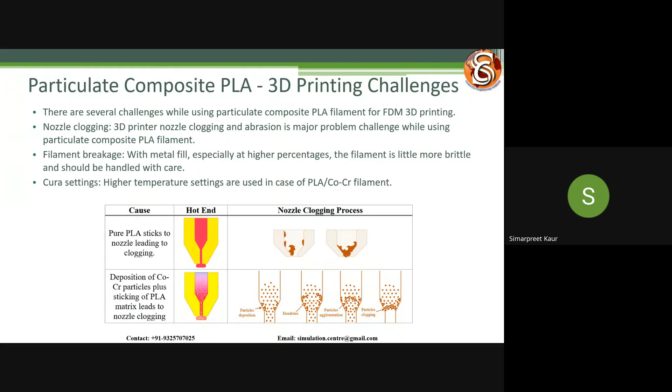We also needed different temperature settings, since the same temperature was not going to work. We wanted to keep as much of the same printer parameters as possible, but we had to change some things, like temperature and speed.

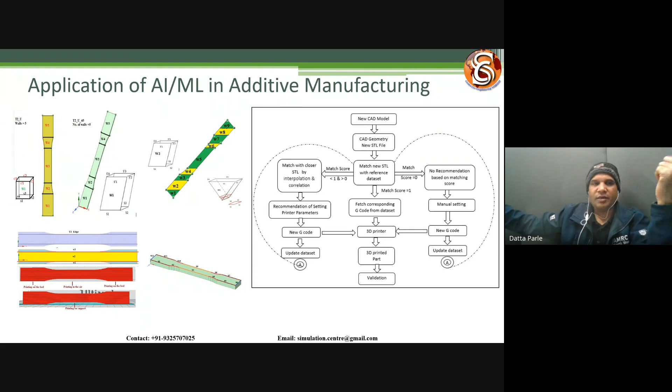I'm almost coming to the end. Another student in Pune worked on building an artificial intelligence model for knowing what orientation to use based on experience. She has also completed her thesis. Both students have completed and defended their theses, but I'll talk more about that in another forum.

I wanted to talk about something else, though we don't have much time. We had very state-of-the-art 3D printing machines in our research center. Maybe I'll show you one - this is one of the world's largest 3D printers in its category. I'll just play the video, and with that we can make a full stop.

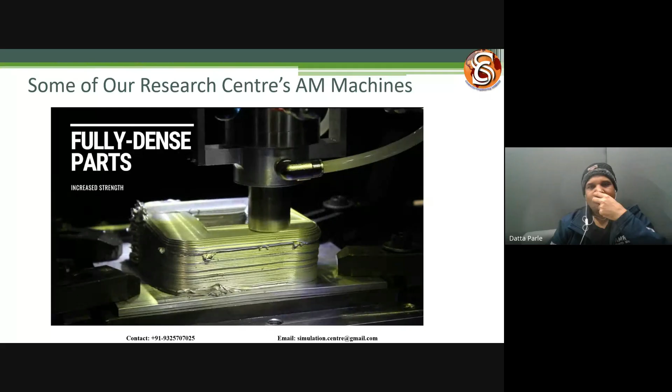What makes the MELD process unique is that it's solid state. There is no melting; we stay below the melting temperature. This results in really great characteristics in the build - not only great material properties, but our deposits are also fully dense, meaning the part doesn't require a secondary step. And there's very little waste. It's a very green process.

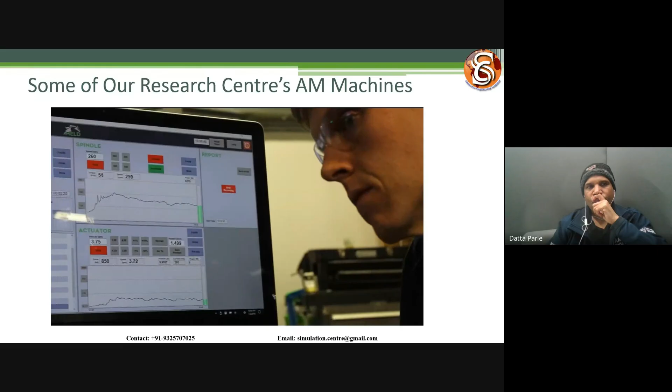We're very passionate about the meld process and driven to see it take off and proliferate throughout industries. The machine itself is very robust, capable of processing soft materials like aluminum up to nickel alloys. It's repeatable - it behaves like we want it to. The automation system performs as you expect and does what you tell it to do, so you can program your geometries and come back to the same result every time.

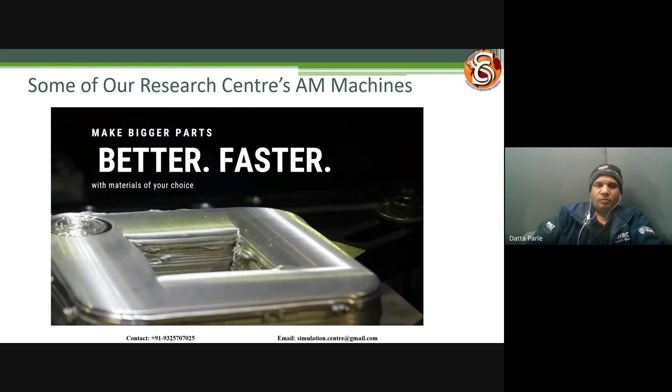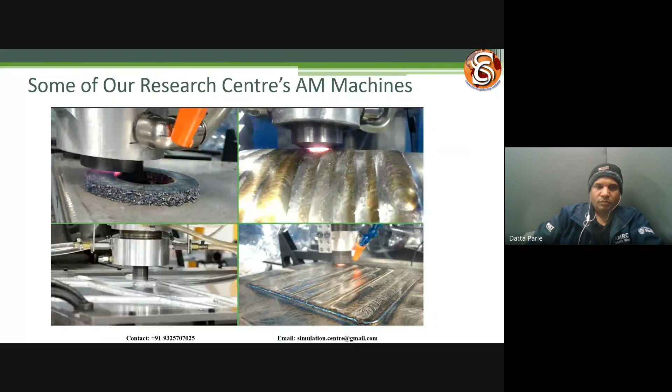When you compare the meld process to conventional additive manufacturing, we're putting down a lot more material, a lot faster. So if you want to build very large components quickly without additional processing, this is a good opportunity. When customers reach out, we're excited to educate them about the process and figure out how it can help their needs. We can repair unweldable materials, join or coat dissimilar materials - the options this process creates really open up new product opportunities.

Everyone involved in the manufacture of metal or metallic components has, or should have, an interest in this process.

This is Europe's largest machine, located at our research center. I won't speak about other machines, but you have metallic rods - you deposit, more like friction stir welding, reaching a melting-like state, depositing the way you want, and then finishing, which is how you get the complex part. That is one of the core research areas our research center works on.

To conclude, 3D printing is an additive manufacturing process to print any object. Today it is very commonly used across product life cycles - no longer just prototyping, but becoming more of a product manufacturing method. FDM is most popular with the common public, while industrially there are a whole set of different printing processes and technologies. Several materials can be used, from metals to plastics - I talked more about plastics, went through some of the challenges and how to overcome them for biomedical applications. I hope that was useful.

Thank you very much, and if there are any questions, I'm happy to take them.